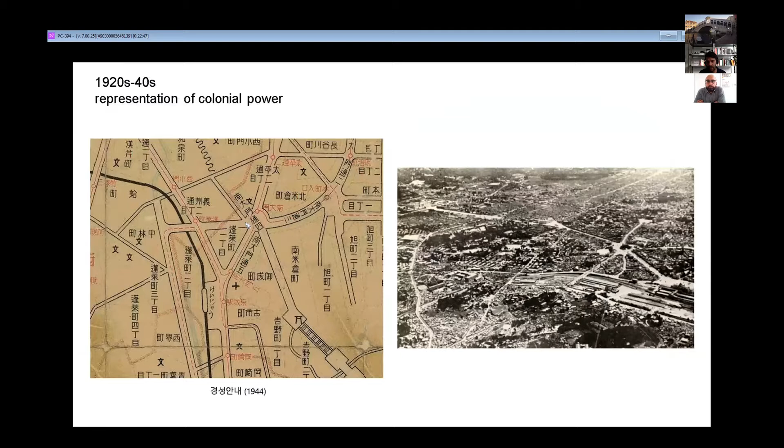This is a picture that tells terrible stories after the war. Everything was like a kind of tabula rasa, which was something we also experienced in Rotterdam after the Second World War.

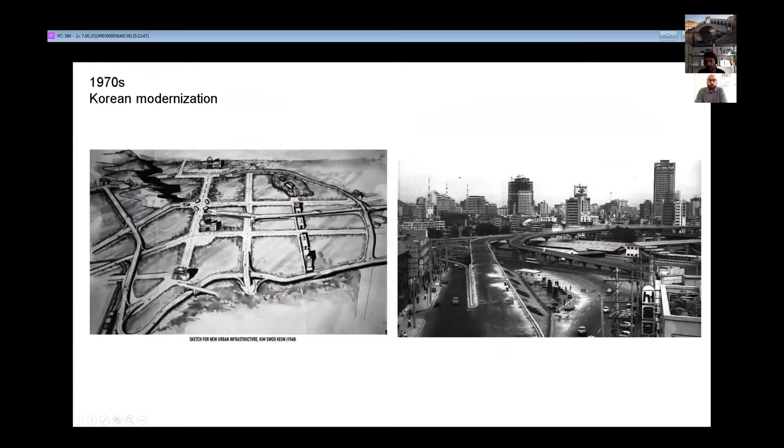From the 70s, you see that the Seoul Bridge is already there, already in place, used for vehicles. It was thought for cars, but also like a place where people could gather together, protesting or celebrating democracy. So this is how it was when we started looking at it and made our investigation.

The bridge is here, as I was saying, and this is the main train station. We also did a competition on this side, for a new CBD. This area will grow more in the future, and it will become the economic center of Seoul.

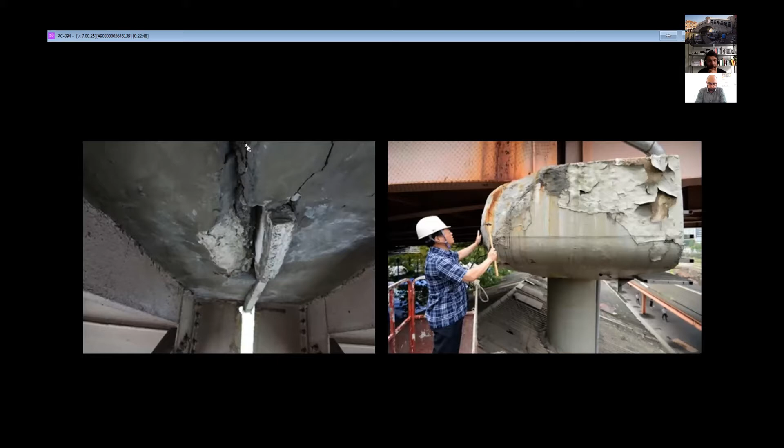So this is the very first image we saw about the project. And we also have to confront with these kinds of damages, which is something we'll dive into later when we make a comparison with another example you might know better.

The whole of Korea was quite a dangerous place for pedestrians. It had about four times more incidents than the US or other countries, and it was also quite polluted - the most polluted country in the world. So this was the situation, and it used to be a big problem.

The car had an advantage over the pedestrians, who had to make a long run to reach the other side of the train station.

The mayor and the president of Korea had a great vision. They wanted to make a big shift, turning all these pieces of infrastructure into a more blue and green system. This is the project they made, and as I was saying, it became very popular. This is the mayor of Seoul who then became the president of Korea. This was the mayor when we inaugurated the project in Seoul, who promulgated this idea of turning the whole infrastructure, the whole city, into a green park.

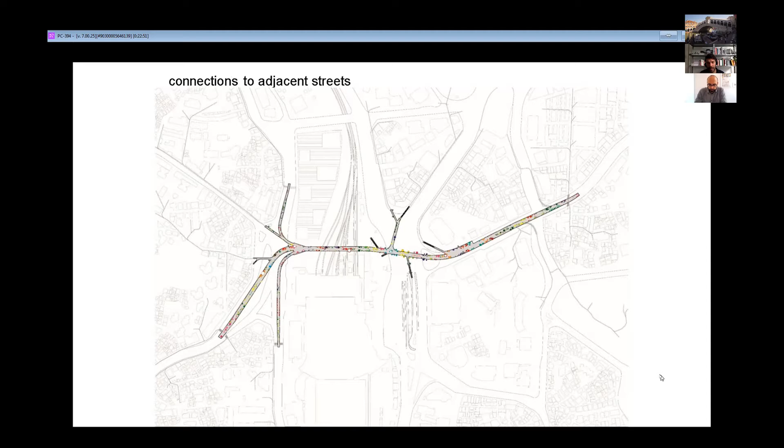As I was saying, we thought of this as an organism that could grow and expand over time. Here you see the first intervention - we wanted to expand and connect to the neighbors. In the future, this can even be extended more and more until we can realize a dream of greenifying the whole city.

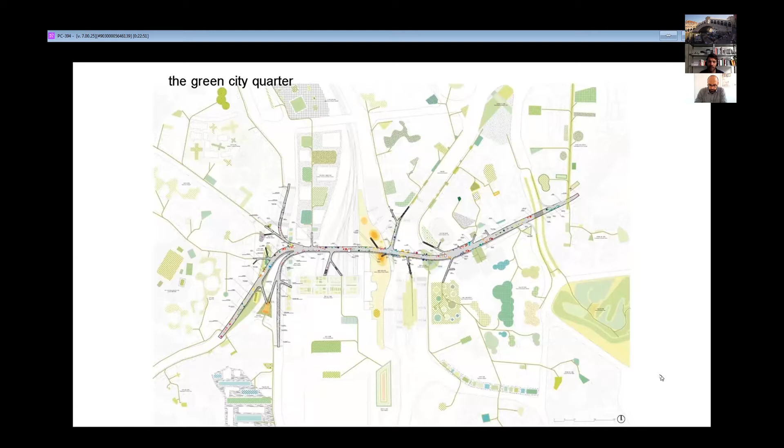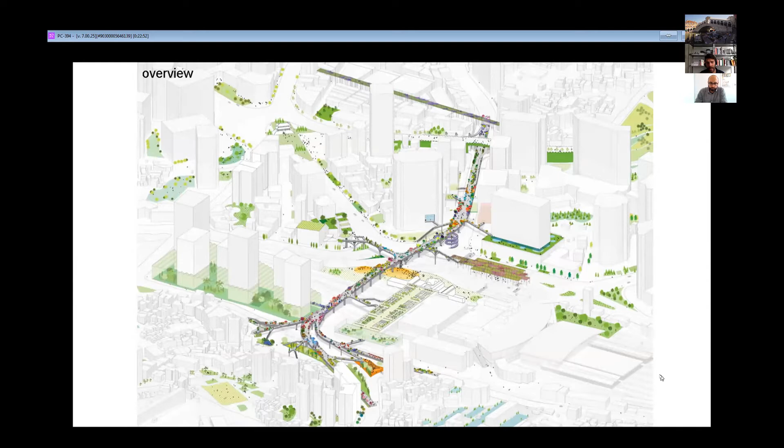So this was the actual situation when we started looking at it, and this is what we wanted to achieve - a much more greener and healthy city.

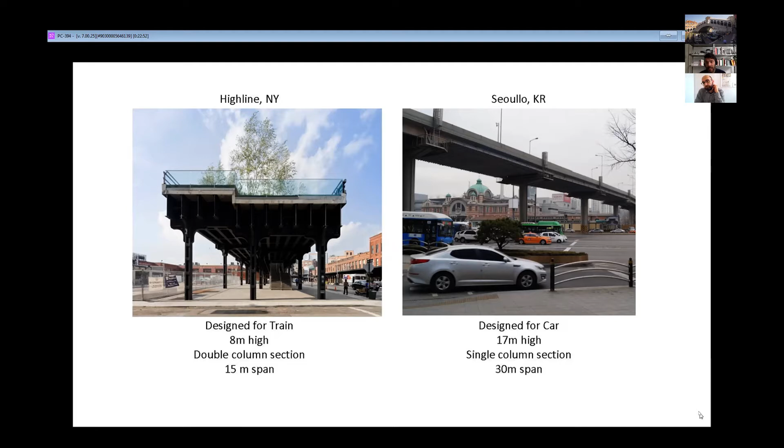So we had to confront the structure as well. As you see on the left, they have huge columns, a very low height, and a great structure because it was thought for trains. In our design, we had a design for cars, and then it's all based on concrete with a single column.

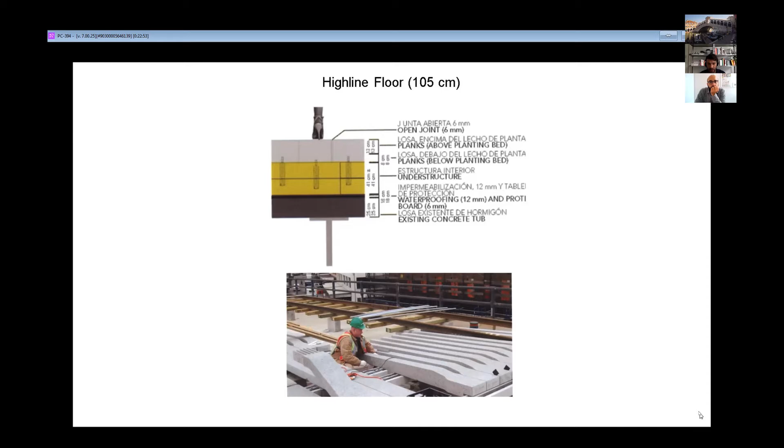This was a huge problem for us to design what we wanted to design. Because of the structure we had, we calculated that we could only have 10 centimeters of soil covering the whole surface.

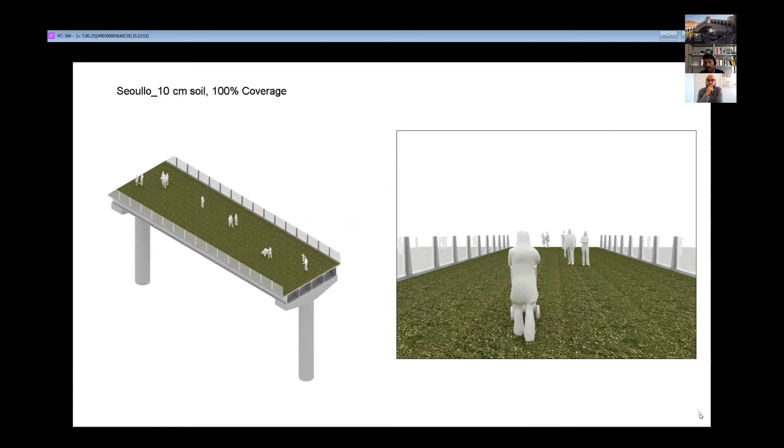But we didn't want to do that, because it was also similar to the New York example, and we instead wanted to reinvent the wheel. We wanted to create something new, something peculiar, something that was like for Seoul only. So what we did was concentrate the soil in pots, so we were able to have a much thicker soil amount, and so we were able to plant trees, very high trees.

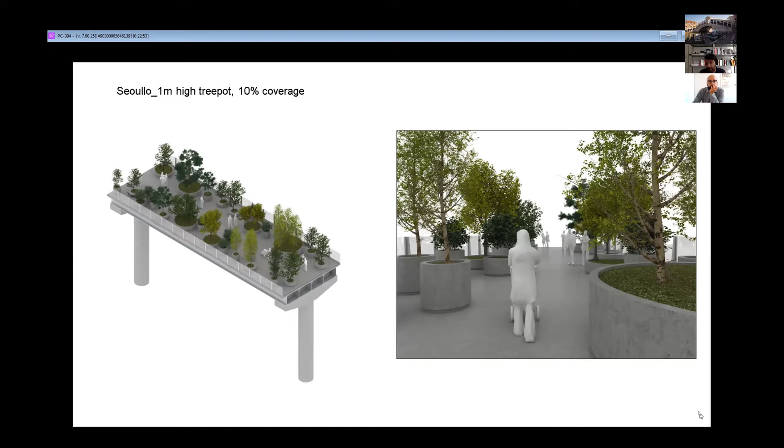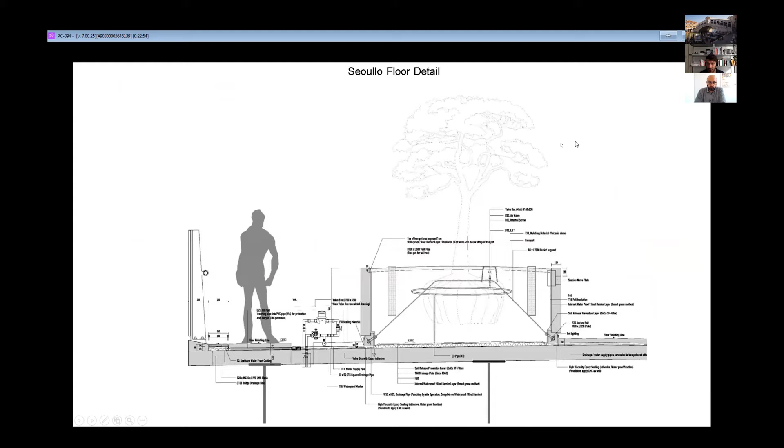This is the detail of the Highline, and this is our detail. As you see, the amount of soil is pretty much the same, but it's concentrated. We also studied this kind of system because the wind can blow the trees away, so there's a kind of anchor to the main vase.

So this is in numbers: 50 families of trees and almost 230 species. We wanted to boost the biodiversity in the city, which is something we really focus on as an office. One of the books that Lorenzo was showing before is called BioCity, and well, that's what we've done.

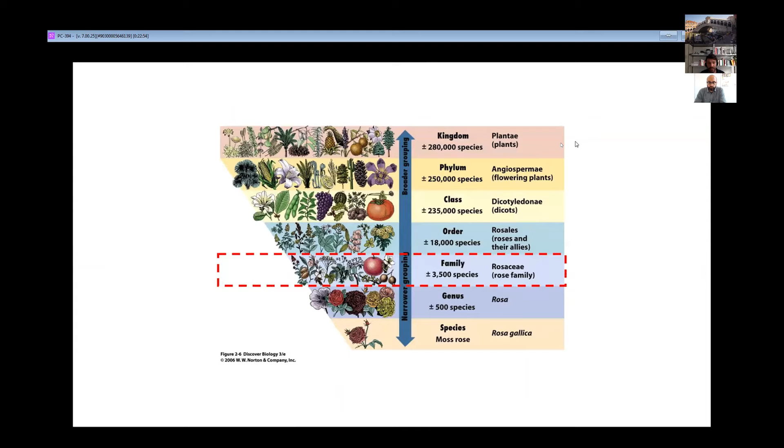We scattered them. We started investigation on which types of families we wanted to put in, and as I was saying before, we also wanted to curate the display of these trees, so they are placed in alphabetical order.

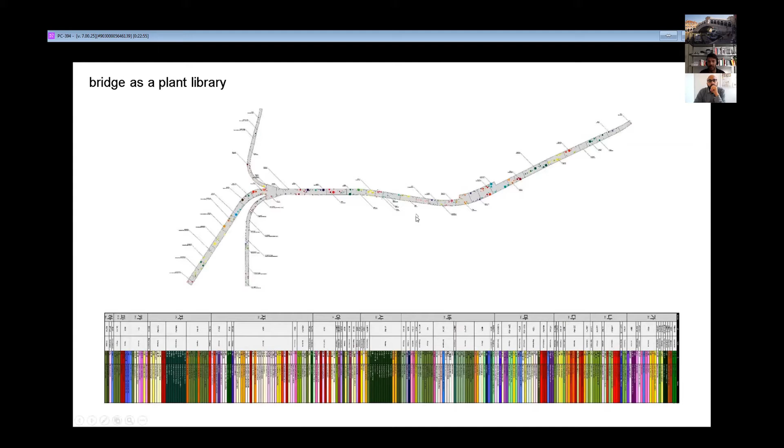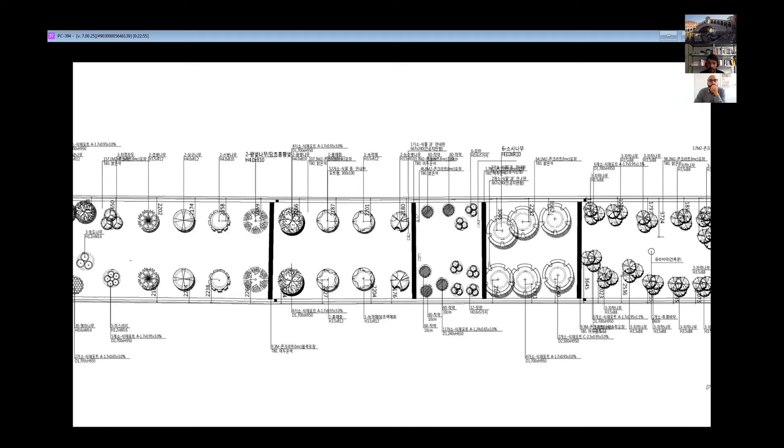From A to Z, but in the Korean alphabet. So if you walk left to right or right to left, you will see all these trees in alphabetical order or counter-alphabetical order. This is one of the detailed drawings we produced together with a Dutch landscape architect and also a local one, showing how we displaced all these trees.

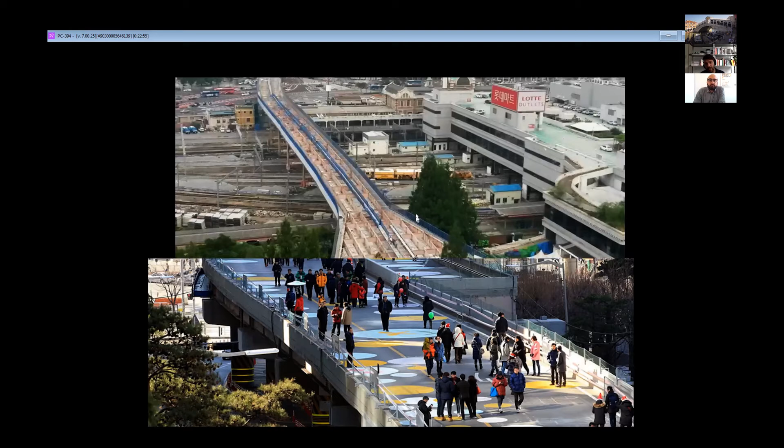It took us 17 months to get built. Initially we wanted to realize or envision what the future would look like, so we painted the footprint of the tree pots on the bridge, to let people experience it. Then after that, we cleaned the floor and restarted making the floor.

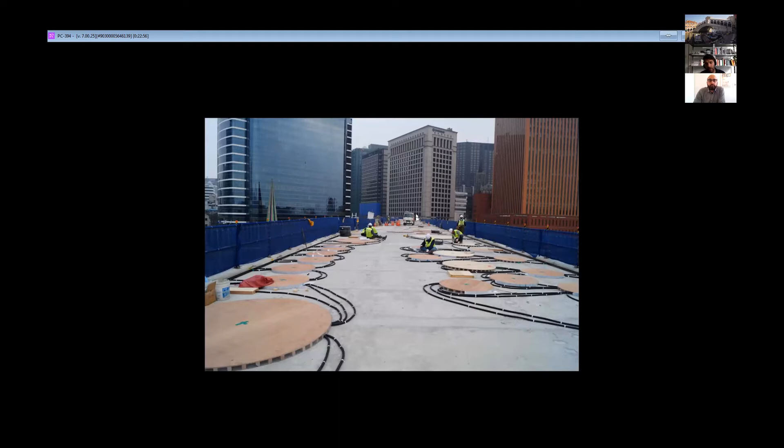It's all prefab, as you see. We also started putting in this screen, so you can already foresee the future in this image.

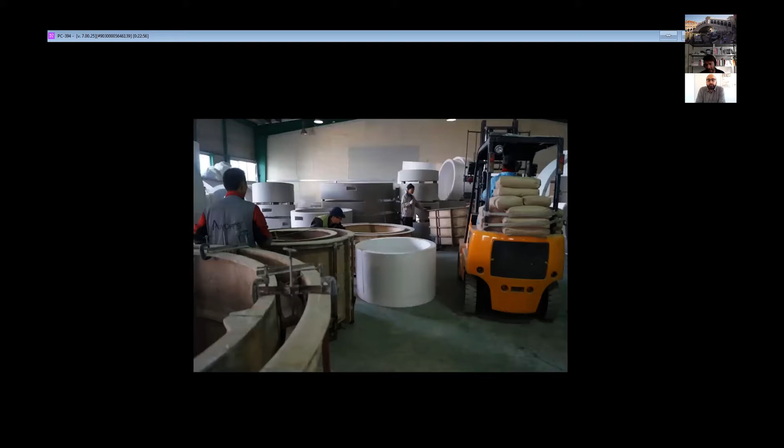Here's another one. Here the concrete layer is done, and we left the spots for the pots. In the meantime, all the pots were produced in a factory, so we were able to compress the time frame. Then we put them in place.

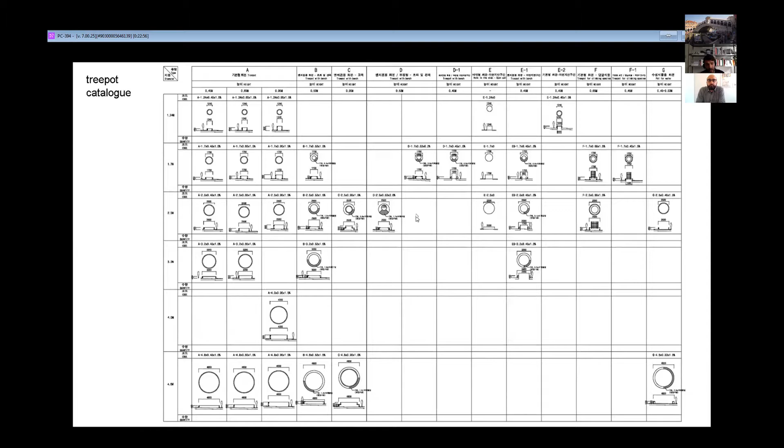We took the soil and then planted almost 650 trees all along the surface. Here you see the roses.

And well, immediately after we opened up the park, people started using it, and now it's a very iconic place for Seoul. People love it because it's fresh, it's friendly, it's for pedestrians only, and also at night it's quite a beautiful space.

And as I was saying, you will find all the different types of vegetation, from lilies to real trees. And what we're really happy with is that people from all ages use it. So it's biodiverse, but it's also diverse in usage, with elderly people as much as kids using the bridge daily.

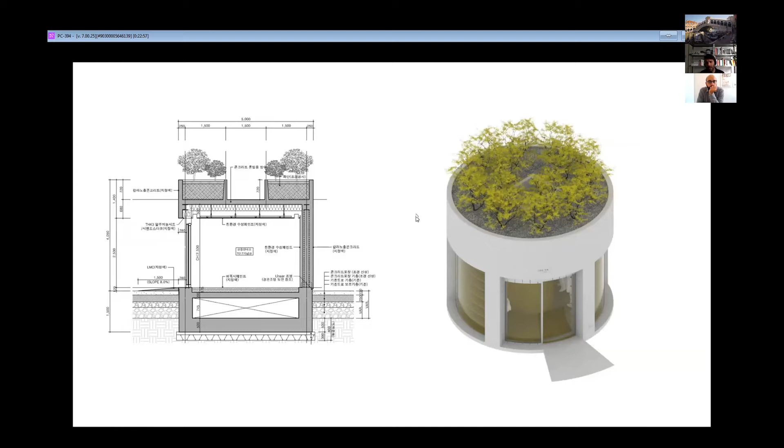We also scattered some activators throughout the whole surface. What you see is in the same language, used as tree pots as well as activators for the people. What you see now is like a bar, and here's how we built it. Of course we wanted to make use of the terrace, so you will always find a tree and a viewing spot.

Here's another example that goes in the same language of the bridge and the tree pots. One more - this is basically a performance stage. We covered the whole cultural spectrum, from exhibition to stages.

We also had food and beverage. We have all the possible types - this is a periscope, and trampolines. This is something we really wanted to show.

Is it actually the section of the bridge, as you see? It's very funny to see how people love this spot and look at the street below, and then you have like this.

Well, we kind of want to show the true nature of this piece of infrastructure. This was the day before we inaugurated, and we thought this would be the same situation the day after. But actually, it was completely different.

Almost 30,000 people showed up. It was so crowded that we couldn't even manage to meet the mayor, because he was among this huge flow of people. So these are the people who worked on the project.

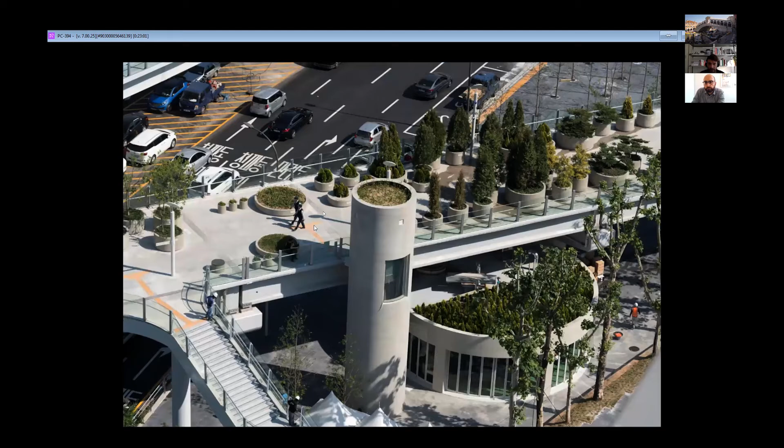You see, it's not the bridge itself, but we want this concept to expand in the city and conquer other spaces and revitalize them. So this is the staircase, this elevator. Here you see people going up and down. It's friendly also for handicapped people.

Here's another connection, this is walking around. What we're really happy with is that we proposed to connect the bridge with the surrounding buildings, and they accepted, and it was a big success. As you see from this picture, the relation between the bridge and all these cafes around is very strong. Now every single cafe wants to be connected to the bridge.

Another topic was the night. We want this place to be also very attractive and very iconic at night. We analyzed a lot of color and a lot of possibilities, and we were basically looking at the sky and at performances. The blue tone was kind of a symbol for that.

What we did was put an LED strip all around the pots so they could light up at night. The blue light is very good for the plants, because the blue and red parts of the spectrum heal the plant, help them grow and recover. So at night, what we do with the lights is help the plants be healthy. Because of course they're inside the city, so you have a lot of pollution and stuff, and with the blue light we can help them stay healthy.

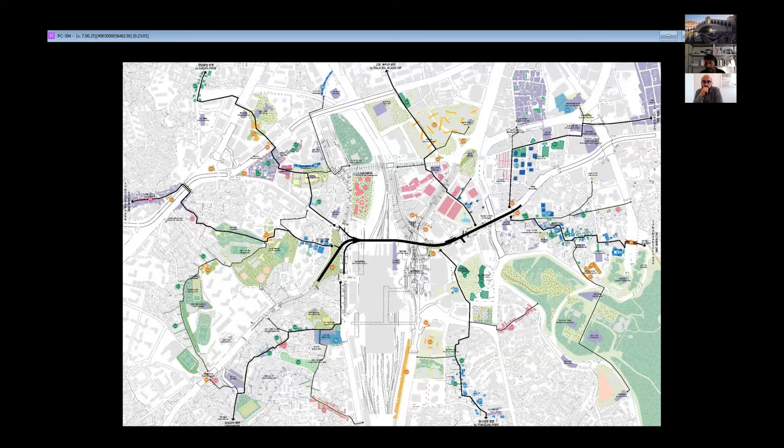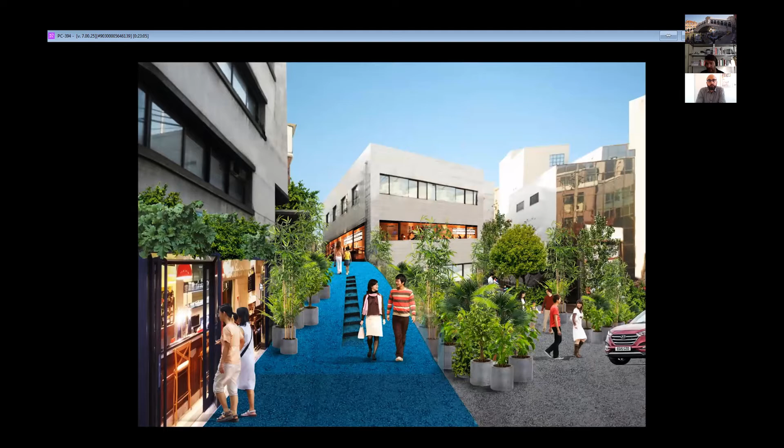We didn't want to leave the project as an entity, but wanted to make it part of a system. So we thought we could make a master plan and envision different branches that extend throughout the city, conquering new spaces and greening the whole city. This is how Seoul looks like, but this is how we wanted to make it in the future: green, pedestrian friendly, a place for the people.

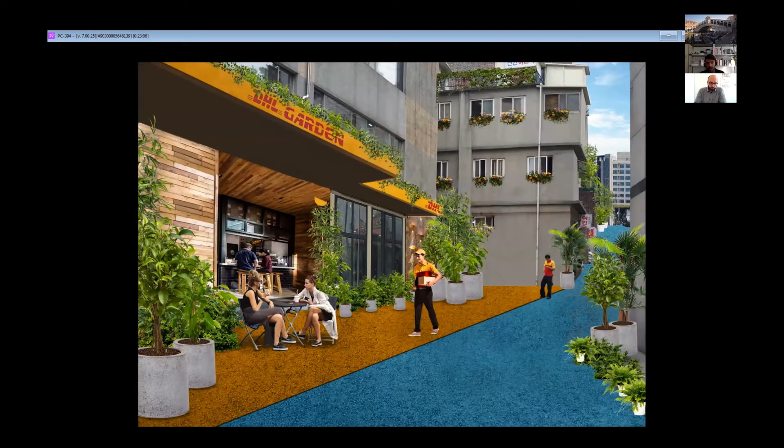This is basically a parking lot, and this is the very heart of Seoul. This could be a wonderful place, and that's what we wanted to turn it into. You see dead land and parking spaces, very dirty, and this is the kind of future we want to create. We want Seoul to be like the test site, a place where everybody can go from a very polluted city to a very green city.

From a very anonymous street to a super iconic one. From the entrance to the highway, which is usually dirty and noisy, it could become a connection and a pivotal point in the city.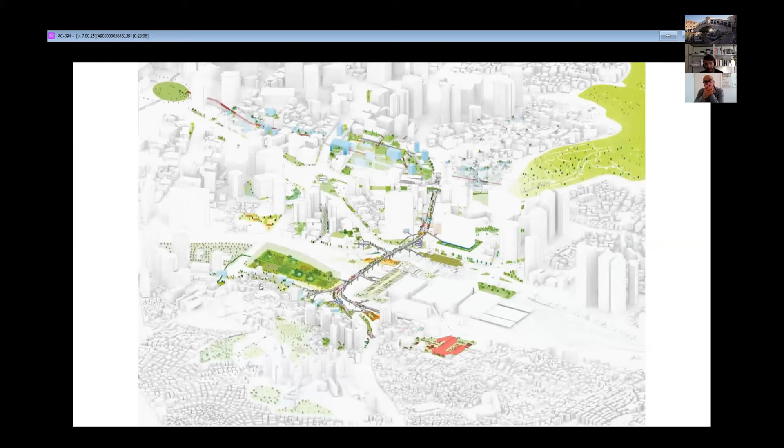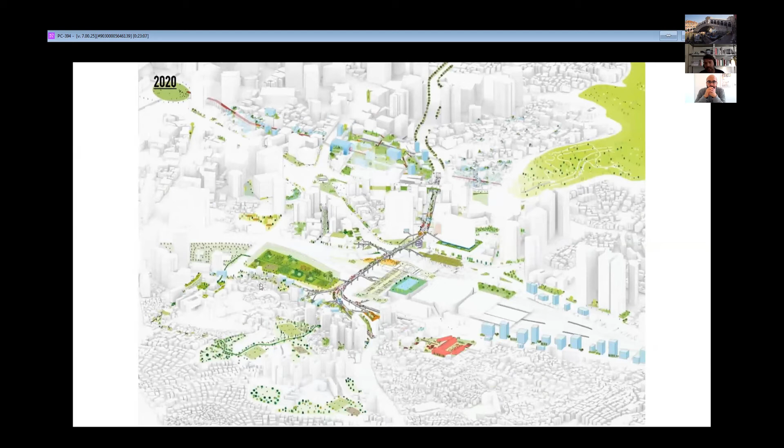So here you see the GIF and how we thought of this, from a car-oriented city to a pedestrian-oriented city, in which we can boost the economy, creating new developments, expanding and densifying the city, and creating a better city.

This is a project that Zaha Hadid built in a nearby area, and it cost about 400 million euros. Our project cost 8 times less. And the guy over there, it was also bloody expensive. In terms of return on investment, people experienced our Seoul bridge way more than the other two, because it's public and accessible to all.

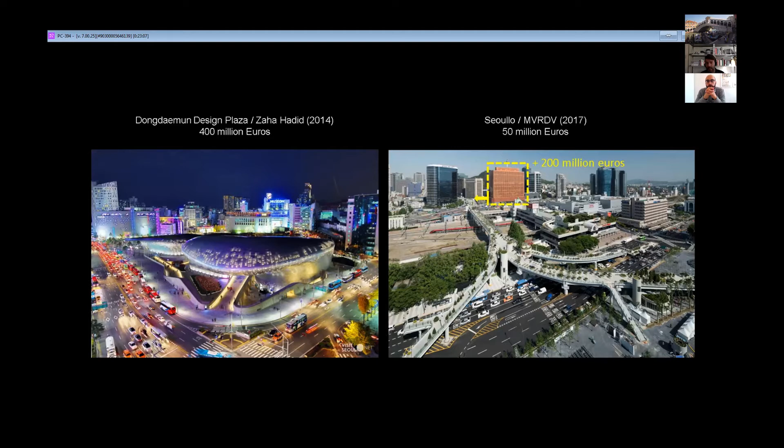So to conclude, the vision we have is to expand Seoullo all around the city, and also to create a ring out of the city. We wanted to transform Seoul from the most polluted city in the world to the least polluted, the most green. We have the dream to transform these abandoned pieces of infrastructure into social infrastructure, into green infrastructure. It's about changing the world we know and transforming it into a new reality. I believe this is it.

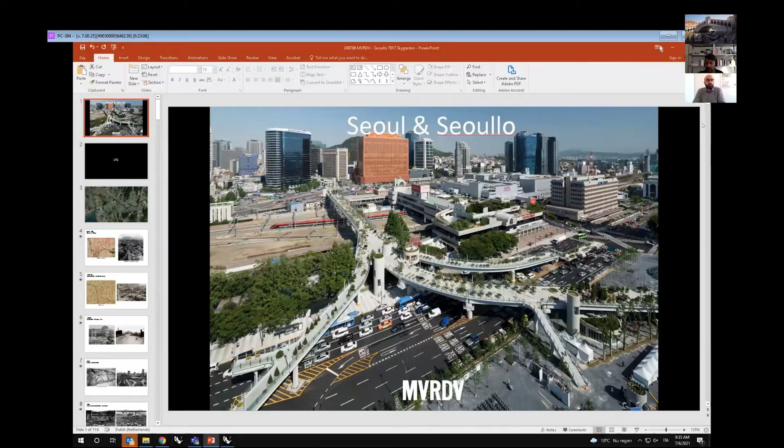So this is about temporary things in Venice and floating things in Venice. And sometimes, more often than not, the floating things are also temporary.

Venice has the idea of being temporary embodied in the city, because it feels like the city is temporary, and at any moment the water will reclaim the space. Sometimes we're reminded of it because of the floodings, but it's also temporary because it's a city that works very much based on seasons, on fluxes of tourism, on special events.

Right now, by the way, today I'm in Venice, and right now there is the G20 in Venice. There's a big event in the Arsenale. Everything is sealed off, and it's quite difficult to circulate around the city.

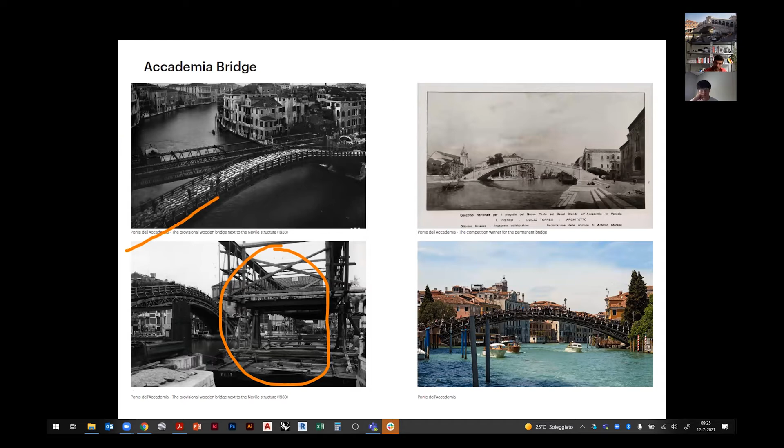They decided to build a temporary bridge in wood in 37 days, really just a temporary solution while they were waiting for the result of the competition. This is the result of the competition, this is the winner - the bridge that was supposed to be built, which looks a little bit like the Scalzi Bridge, and eventually was never built.

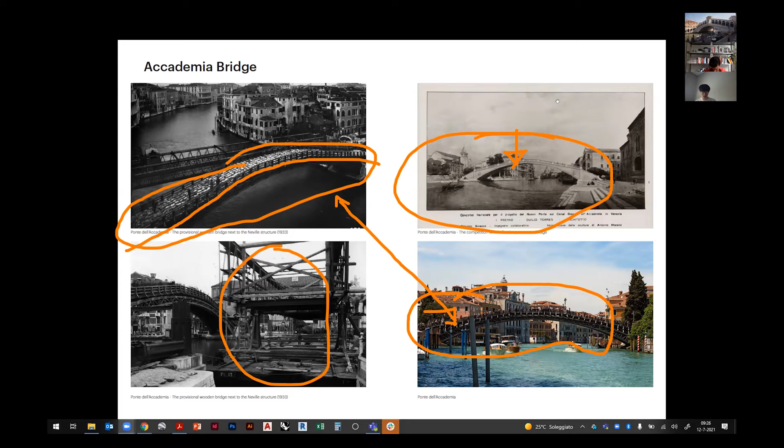So what you see today, with a lot of maintenance and additional reinforcements in steel and so on, is basically the same temporary bridge from 1932-1934. So this is a case where temporary becomes permanent because of indecision, and this also happens in Venice.

And then I want to show you something very traditional. This photo is probably from the late 1970s, beginning of 1980s. Venice has the movie festival in Lido, but at the same time, usually there is an open air cinema which takes place temporarily in one of the squares.

At the beginning it was in Campo Sant'Angelo, a scaffolding structure that would last for about a month. The first two weeks were all the movies from the previous year, and then the last two weeks were the actual movies running at the movie festival in Lido.

Then they changed the square to Campo San Polo, but it's the same idea - it becomes a sealed area with some scaffolding for higher seating, and this runs for about a month. I don't know if it runs to this day, but it ran until a few years ago.

This is a work by Alvar Aalto at the Giardini of the Biennale. This was a commission - he had only two weeks to come up with the plans. The idea was always that it would be built and then could easily be demounted and put away. It was never thought to be permanent; it was a very temporary pavilion.

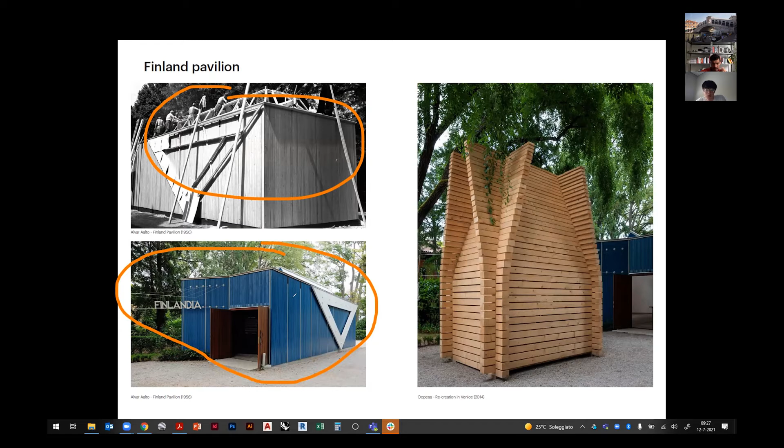And this is when they were building it in 1956. Eventually, it stayed, and it is still there today - it became the official pavilion for Finland.

Next to it, just a few years ago in 2014, someone did an additional temporary pavilion. But in this case, it really disappeared after the event.

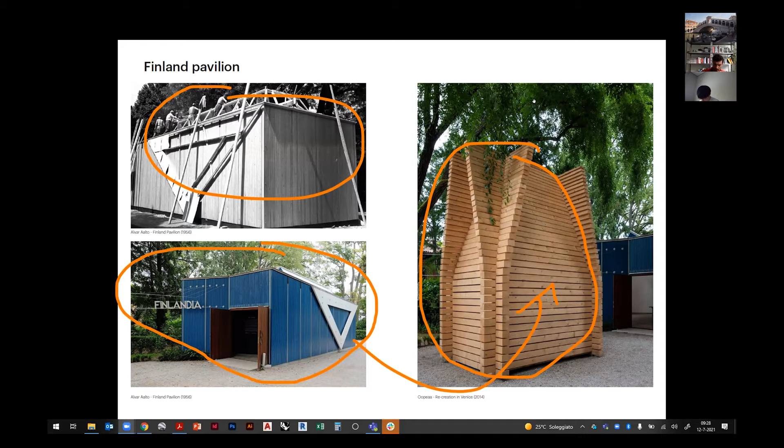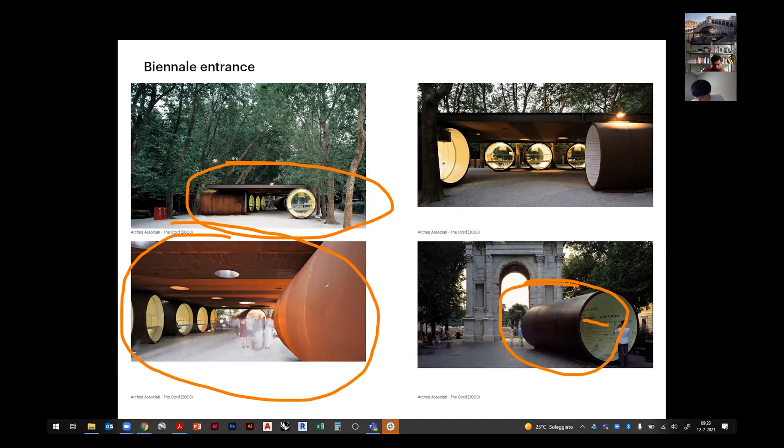It was nice, made of several pieces, so these pieces could be distributed around the city and be informative. Some of these pieces could also travel to other cities to advertise the Biennale in Venice - they could be in Rome, Genova, or other places. It was a smart idea, and eventually it was removed.

This is art, just an example. Of course, once we talk about the Biennale and art, I would say almost every year there is something temporary, something around the city that you can see, and then it gets removed. So this is just a very tiny sample.

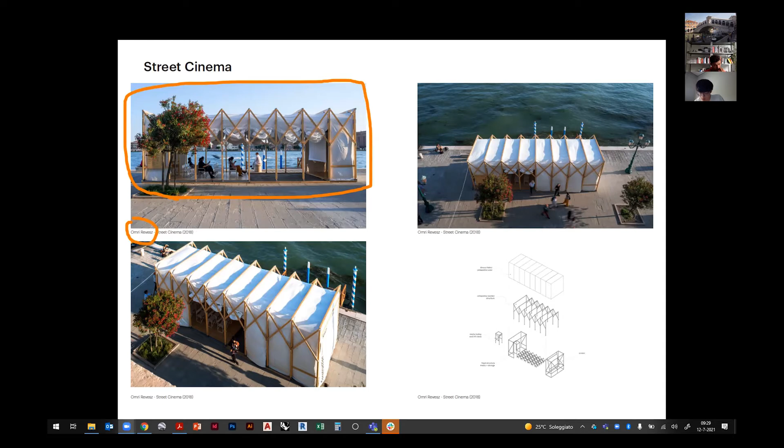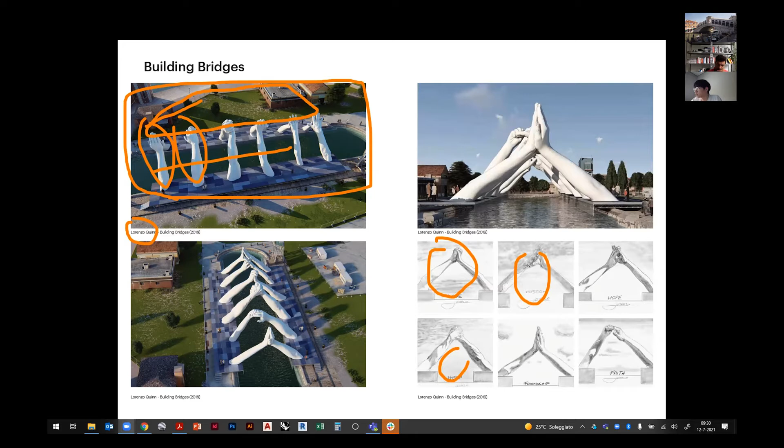It's interesting because in 2020 I found out there were many temporary events based on the use of the boat, because suddenly the boat was super safe during COVID time - you were outdoor, first of all, and by being in a boat you were automatically isolated from other people. So within the Arsenale they had this sort of drive-in, but with boats. They called it Barchin - barca in Italian is boat, so it's like boat-in. It's kind of neat. I don't know how long it lasted, maybe a few weeks, maybe a few days. You could go with your boat inside the Arsenale and watch a movie.

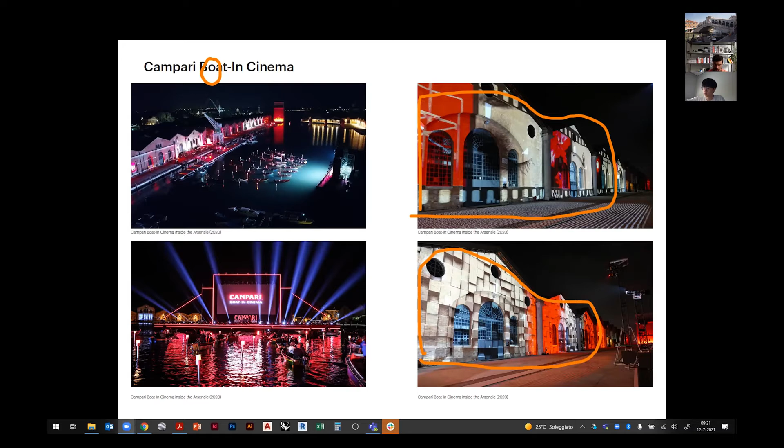A similar but fancier event, sponsored by Campari, was called Campari Boat in Cinema, but it actually looked more like an art installation with projections directly on the warehouses of the Arsenale. Looks quite interesting. So those are some examples of temporary things that happen in Venice, and there are many more.

This is about floating elements. Venice makes almost no use of floating architecture, floating structures, or floating devices. In the Netherlands, where Cosimo and I reside, there are plenty of boat houses, restaurants on boats, all sorts of things on boats - but in Venice that just doesn't happen. There used to be a Danish family living in a vaporetto - they bought an old vaporetto, refurbished it, made it into an apartment, let's say. But eventually I think they left; they had to abandon Venice.

So the only permanent elements that are also floating are the vaporetto stops. They're permanent in the sense that you'll always see one, but it might not be the same one, because one advantage of these is that they can be repaired - you just take the one that needs repair and substitute it. But those are the main floating elements that are always there. And then there are many temporary floating elements for recurring events.

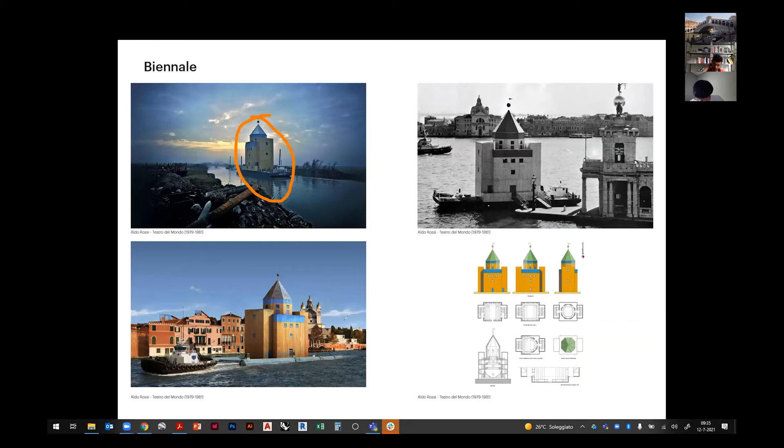This is a renowned structure that used to be in Venice, called Teatro del Mondo, the Theater of the World. It was built for a Biennale of Architecture and Theater, to provide an additional theater with a central plan. You can see here the drawings.

It was a little bit taking inspiration from the idea of Alvise Cornaro, which I spoke about on the very first day. Alvise Cornaro was a nobleman from the 16th century who envisioned a stone theater floating in front of San Marco, and basically, except for the stone part, this is what it is. It was moored next to Punta della Dogana, and the size was dictated exactly by this. The architect Aldo Rossi wanted it to be more or less the same height.

It looks like wood from outside, but it's only clad in wood. The whole structure is scaffolding, fully scaffolding. This theater stayed for the duration of the Biennale, I think 5 months. Then it actually traveled to Dubrovnik in Croatia, where it stayed for maybe an additional year, and eventually was dismantled.

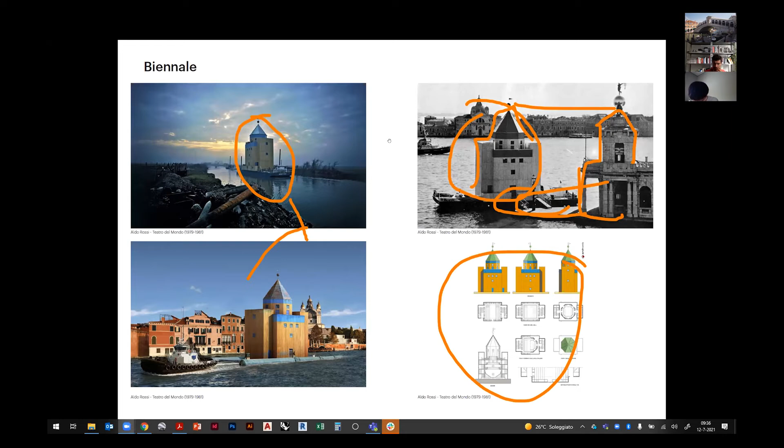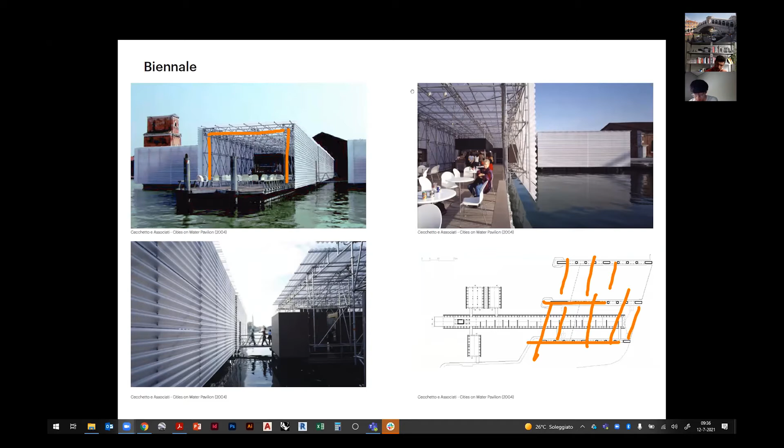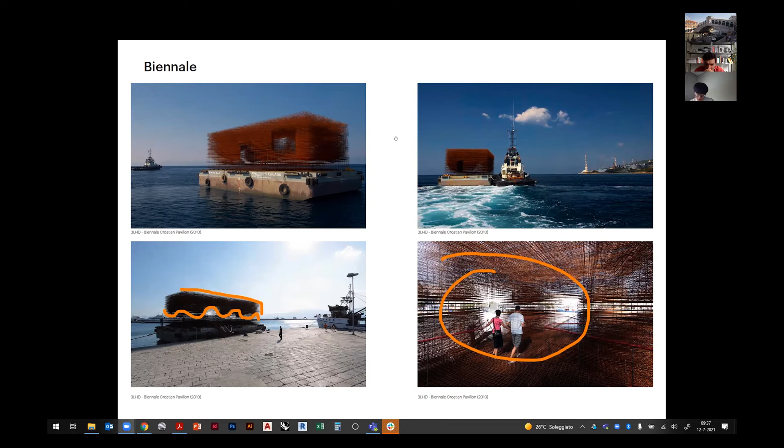It was done with steel rebars, all steel rebars, but they create a space inside. The structure is almost invisible or translucent, and when you go inside, it's also quite beautiful. So it was a simple pavilion, very beautiful, but got lost in the lagoon.

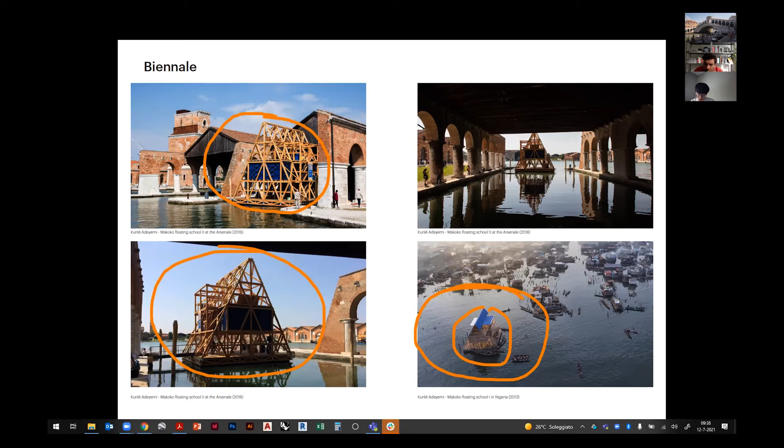This is more recent, from 2016 - an original project by Kunle Adeyemi. Originally he built it in 2013 in Nigeria to work as a school; this was almost a prototype, and eventually it was deemed unsafe and was destroyed. But in 2016 he made version 2.0, with prefab elements. It was a little bit better, and he presented it at the Biennale, where he was awarded the Silver Lion. It was a nice addition - you could step in. It was an interesting thing to see.

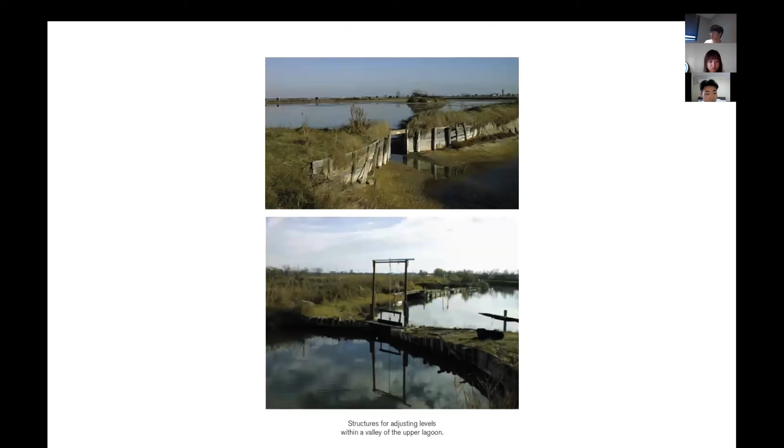The lagoon is characterized and composed of a number of very characteristic landscape elements, which we can tell are also infrastructural: seabeds, mud flats and sandbanks, islands, fishing valleys, landfill gates, and finally the coastal lines, the forms of coastal protection.

On a systemic level, there are two very important elements from a landscape infrastructural point of view that help regulate and protect against flooding. One has a very contested and discussed value, and the other has an extremely important natural landscape value, but is also extremely fragile.

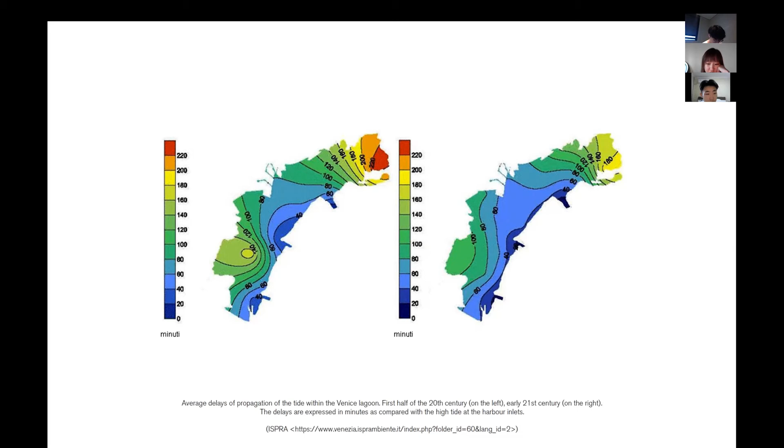The Mose is calculated to withstand tides up to 3 meters, and even to protect against a sea level rise of about 60 centimeters expected in the next 100 years. Again, these projections are still being contested.

The sandbanks, together with mud flats and shallows, constitute one of the most characteristic but also most fragile environments of the lagoon ecosystem. They are subject to tidal waves and tidal flux, to surface variations depending on the quantity of sediments and materials arriving to the lagoon, for instance silt, sand, and other sediments.

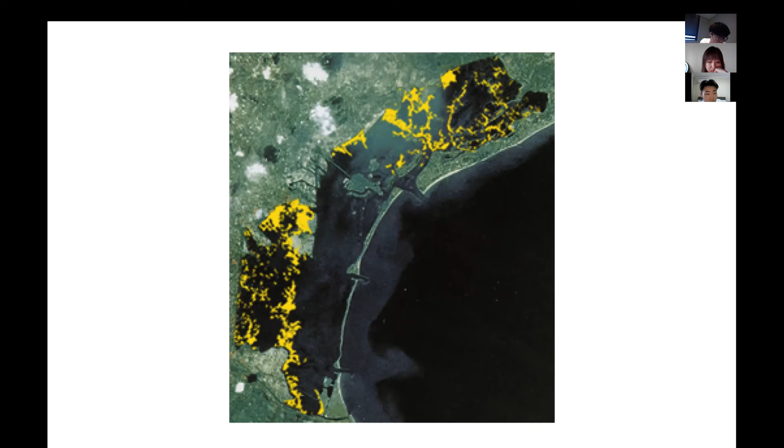So what we've seen now is a number of basic landscape elements of infrastructural value in the regulation of the Venice lagoon, and in the constitution of its condition of human inhabitation and social functions. But in the future...

So then the question is what might be other forms, even a new paradigm, that we might envision for the maintenance of the lagoon as a place of human inhabitation. We can point to two phenomena that are very strong stressors to the future of Venice: the extreme sea level rise, and the compactness of alluvial soils arriving to the sea.

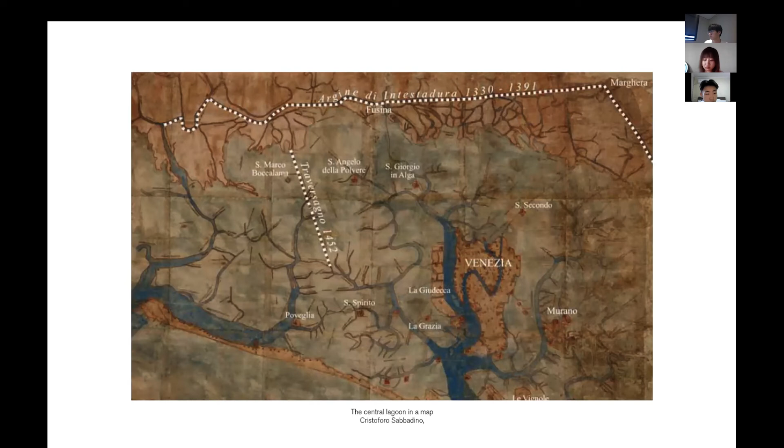More drawings show the lagoon is quite shallow, with some major canals for navigation. It was very important to design and envision what this system of channels, the system of navigation, would be, in order to provide for the maritime system to take place eventually.

There's also a well-known drawing, the plan of the archipelago of Venice, of the historical island of Venice, proposed by Sabbadino, in which he proposes a continuous possibility of movement and connection at the edge of the archipelago, of the main island. This was not only for social functions and use, but especially also as an important defense system of the urban fabric.

Continuing with this, we can see in time the evolution of the lagoon, and especially a very important moment: the modification of the lagoon in preparation for what would become the installment of its industrial activities, especially represented by the making of Porto Marghera, the cargo and economic port embedded in the city.

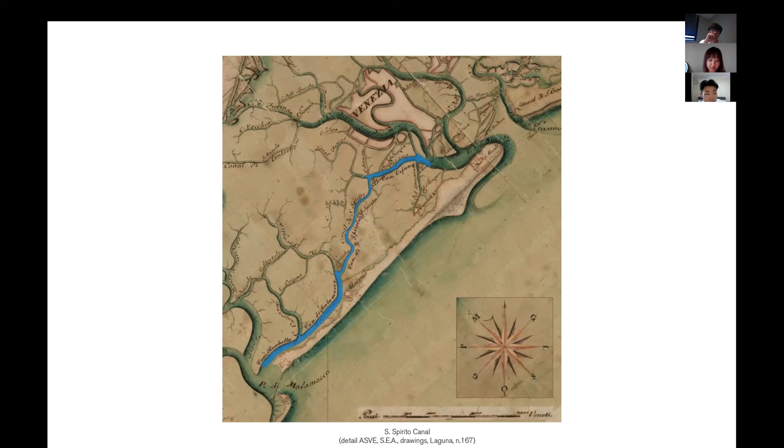The result of this radical strategy of changing the shallow configuration of the lagoon, stopping as much as possible sediments from being accumulated and forming more land and islands inside the lagoon, was what provided the basis for the industrial phase to take place eventually, especially in the 19th century.

As a result of the deviation of the Po River, the typical delta lobe of the Po started to grow south of the Venice Lagoon. So even the Po River delta was influenced by the modifications made in the lagoon.

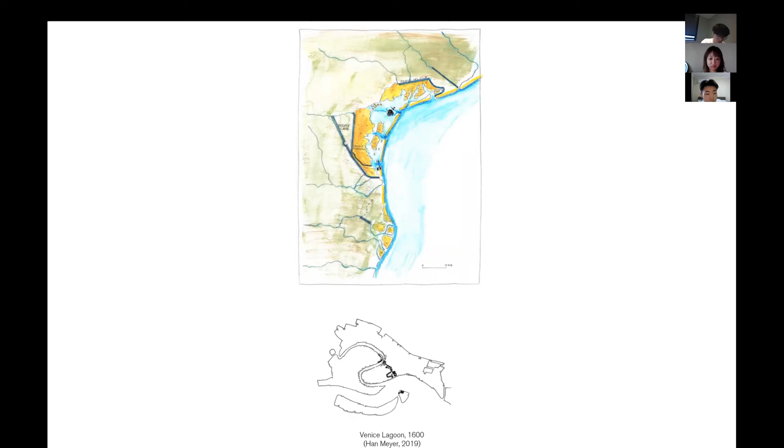The third important moment in the evolution of the morphology of the lagoon is the process of excavation of sediments as a condition for industrial development. So we started with the accumulation of sediments as a first condition for inhabitation, then moved to allow for maritime power to take place by stopping sediments from being accumulated in the lagoon.

And then finally, the third radical movement in its morphological evolution was then the act of excavation, the need to excavate deeper channels to allow for bigger ships to enter the lagoon system. And this is said to be the major cause of flood risk nowadays in Venice and its lagoon, because of the strong flow and entrance of a very high wave movement and the volume of seawater actually entering the lagoon system.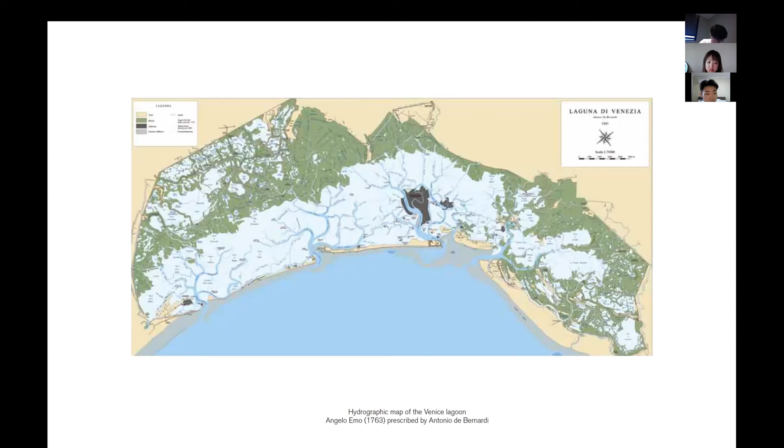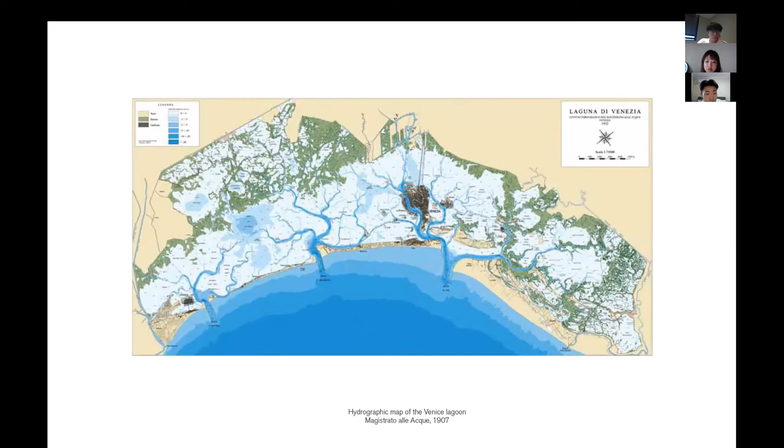So you can see in the sequence of hydrographic and hydrological maps of the Venice Lagoon how much it changed especially in the past 2 centuries, finally arriving to the most recent configuration of, in dark blue, its system of main channels and the smaller navigation channels, supporting both harbors: the tourist harbor in the historical island of Venice and the commercial port in Marghera.

And continuing, especially in the importance of Porto Marghera, not only Porto Marghera but also, as you're going to see in a couple of slides, the making of the airport. Important works from the point of view of landfills, to allow for more large surfaces to be occupied by industry and infrastructure. You can imagine the impact of making landfills and platforms of land to support infrastructure in the very fragile, dynamic equilibrium of the lagoon ecosystem. Especially Porto Marghera around the 1920s, its construction made this strong movement of reclaiming land to allow for the platforms of the port to be constructed.

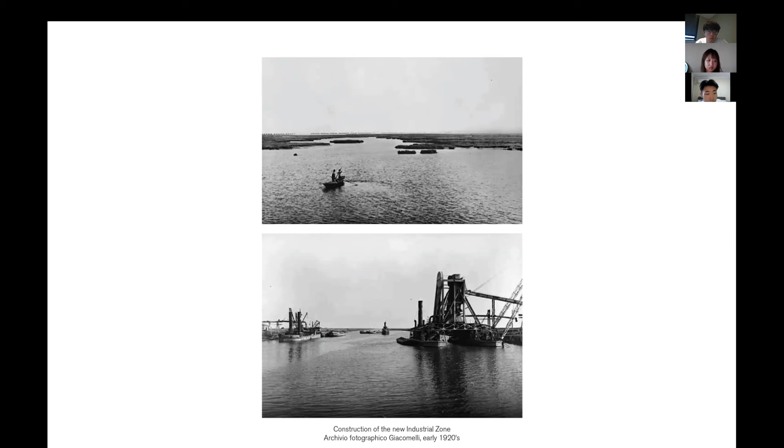And then we can see a very strong beginning of a distinction between the urban fabric of the lagoon, of the islands, of the places of inhabitation inside the lagoon - the historical urban fabric within the lagoon - and the modern fabric being developed in Marghera and Mestre. So a clear distinction in scale, size, and impact into the environment of these 2 forms of occupation.

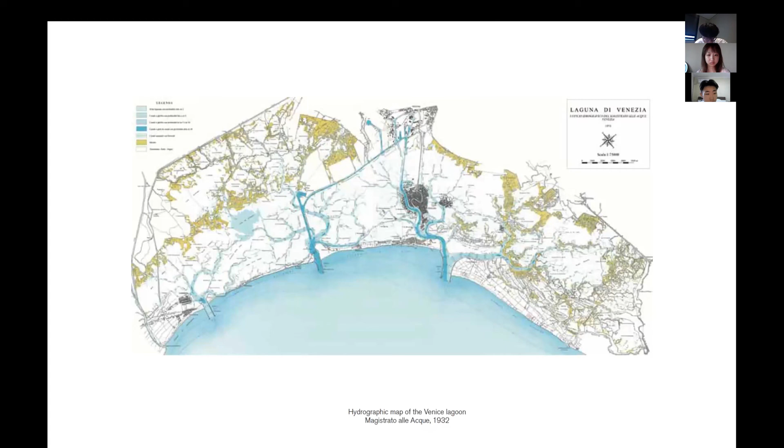The question I would like to pose to you is that we need to start envisioning a different paradigm in the maintenance and even in projecting change, to a certain extent, for the survival of the Venice Lagoon as a place of inhabitation. So what might be a 4th phase in the morphological evolution of the lagoon? The Mose is not sufficient, it's just a barrier in itself.

If we would even think about, for instance, something very common in the Netherlands - the use of dikes, a 2nd row of dikes at the sea - it's also not going to be sufficient to withstand the projections we have about extreme sea level rise.

So then, as we saw from the work especially of Cristoforo Sabbadino, thinking of the lagoon as an anthropogenic system regulated by human actions in close connection and observance of natural processes, what might be a different paradigm that we could envision?

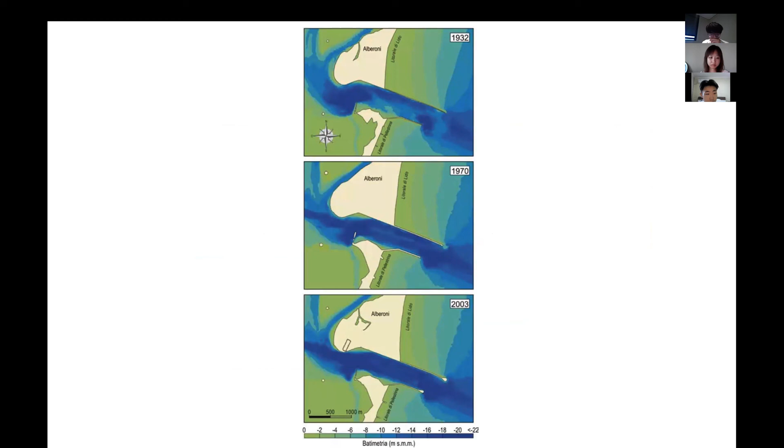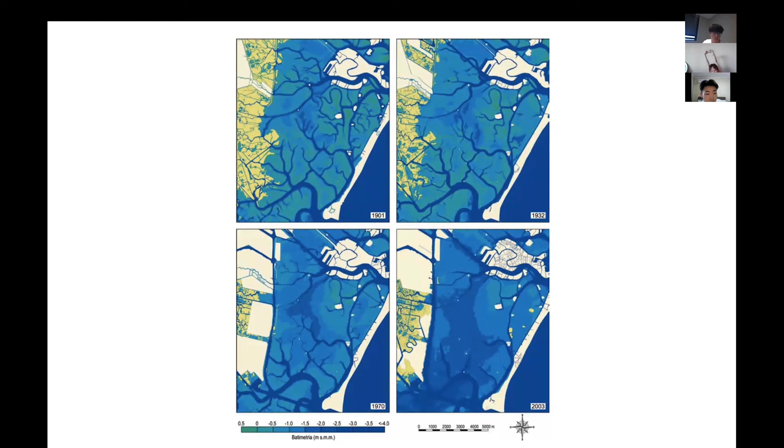As you can see, the historical evolution of the bathymetry in the mouth of Lido is quite remarkable, as is another zoom into the context of the lagoon. There have been strong changes taking place throughout history, to a certain extent a calculated risk, but in light of the two phenomena I described in the beginning—rising sea levels and the subsidence of the seabed and alluvial soil—there is a very strong risk in front of us.

It's an abbreviation for experimental electromechanical module, which is now completed. It was recently put in action again, but as I said, it's a contested infrastructure because it might not be able to respond to the upcoming rising sea level.